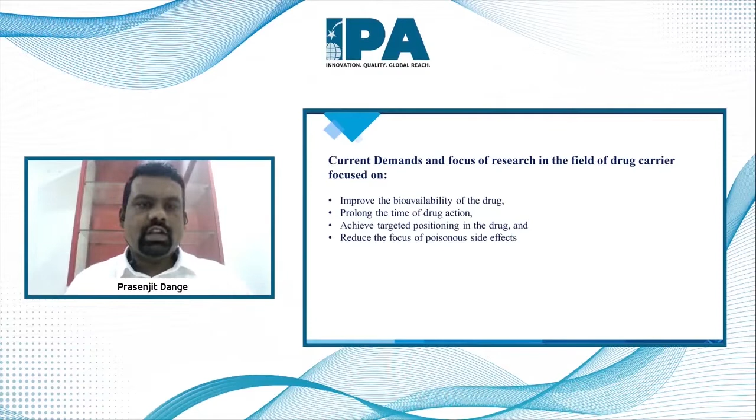So part one covers the current demands of the healthcare industry today, and the focus of the entire formulation research ongoing, in order to have improved bioavailability of drug substances and medicines all across the world, prolong the effect of drugs for individuals, achieve targeted positioning of drugs for a very targeted effect, and reduce the risk of any poisonous effect of the drug substances available.

Nowadays, recent developments in formulation are going towards microparticles, microspheres, and microcapsules, which are widely used as constituents of multi-particulate drug delivery systems, offering both therapeutic and technological advantages. Microparticles are generally in the range of 1 to 1000 microns in size, and serve as multi-unit drug delivery systems with well-defined physiological effects.

In order to improve effectiveness, tolerability, and patient compliance, microparticles, microspheres, and microcapsules are common constituents of multi-particulate drug delivery systems, offering numerous advantages based on structural and functional abilities. Their application is suitable for convenient and tolerable drug administration via several routes. Depending on the formulation, they can be incorporated into different pharmaceutical doses - solid forms like capsules, tablets or sachets, semi-solids like gels and creams, and liquids such as solutions, suspensions, and even parenterals.

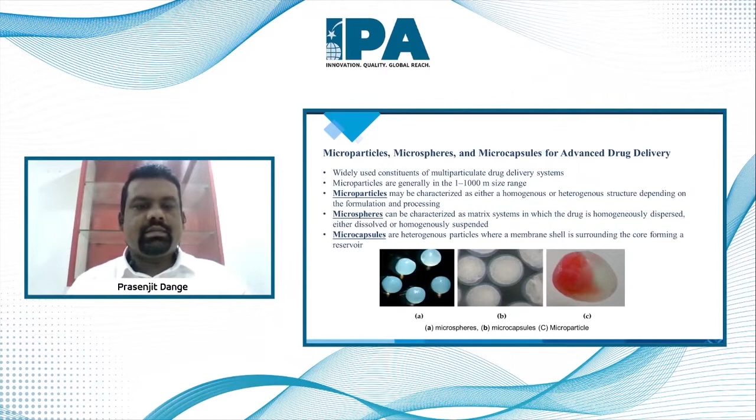The microparticle is a particle which is either homogeneous or heterogeneous in structure, depending on the pharmaceutical process. A microsphere is a kind of matrix that is completely homogeneous, dispersed, and either dissolved or homogeneously suspended. Microcapsules, on the other hand, are heterogeneous particles where a membrane shell covers the core, forming a reservoir. There are several methods for how these particle formations are done.

These particle formations possess a lot of methods - air suspension method, spray drying method, coacervation, and freeze drying is also one of the methods that can be utilized. In air suspension, also called fluid bed coating, there's a great advantage in that during the process the particles suspend in the air as an inert gas, with constant mixing relatively independent from each other, and then it forms dry particles.

Spray drying is widely used in industry for microencapsulation of volatiles, probiotics, and viable cells, having multiple advantages like uniform particle size, all steps carried out in one apparatus, use of organic solvents, and capabilities of encapsulating heat-labile materials as well.

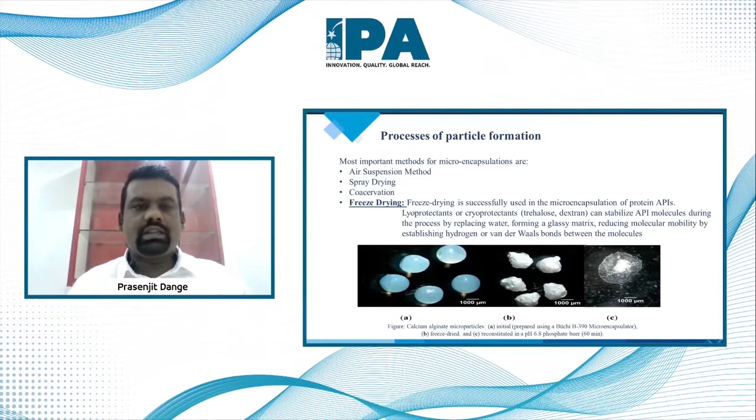There are multiple advantages and disadvantages of microspheres or microparticles in the industry. Focusing on advantages: microspheres have the ability to bind and release high concentrations of drugs, can be directly injected into the body, have controllable variability in drug release and degradation, and possess a constant and prolonged therapeutic effect, which reduces dosing frequency and improves patient compliance. Disadvantages include that they cannot be chewed or crushed, and there is a difference in dosages for drug release.

So this is a brief, overall description of microparticles, because it's a vast, big subject.

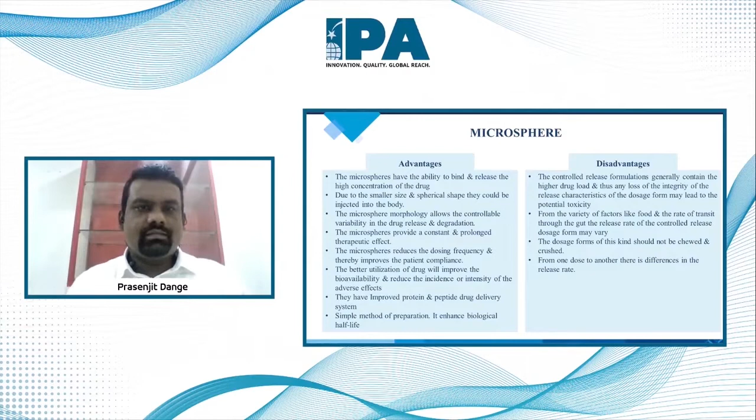That is part two: freeze drying process technology, research and development sharing. We will cover the important parameters of the freeze drying process, the process effects on the drug, protective agents, and the devices used to measure the important parameters of the freeze drying process of the drug.

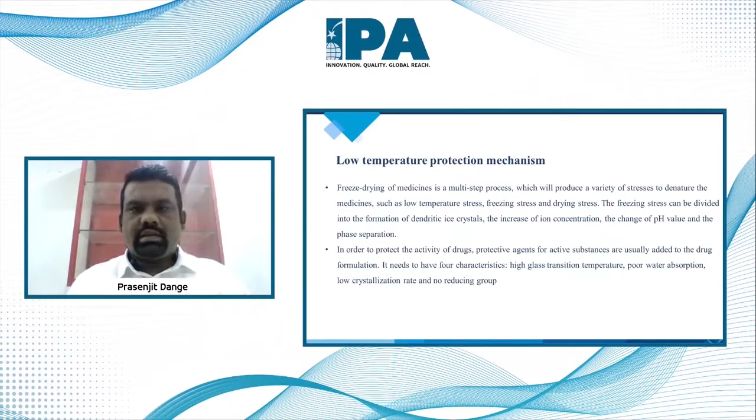As a process, freeze drying requires a protection mechanism because the process itself imposes a variety of stresses on the drugs. These stresses can be differentiated as low temperature stresses, freezing stresses, or drying stresses, and they can result in formation of dendritic ice crystals, increase in ion concentration, change of pH value, and phase separations.

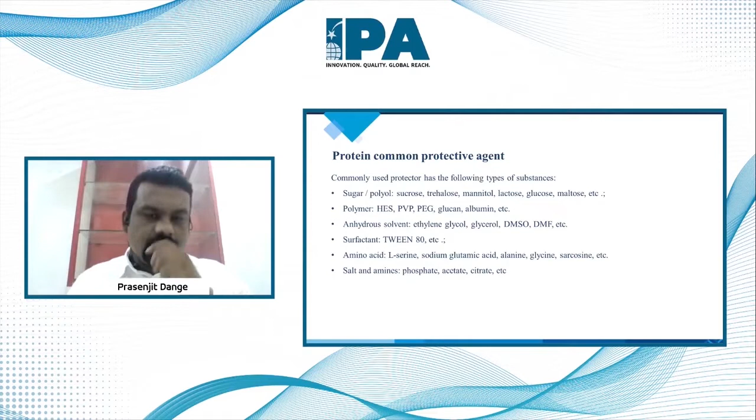To protect against these stresses during freeze drying, we can use a protective agent which plays a role in nullifying them. Protective agents for active substances are usually added to drug formulations. A protective agent must possess certain characteristics: high glass transition temperature, poor water absorption, low crystallization rate, and no reducing group.

There are some common protective agents available for this purpose, differentiated as sugars, polymers, anhydrous solvents, surfactants, amino acids, and salts and amines. These are the different kinds of protective agents used.

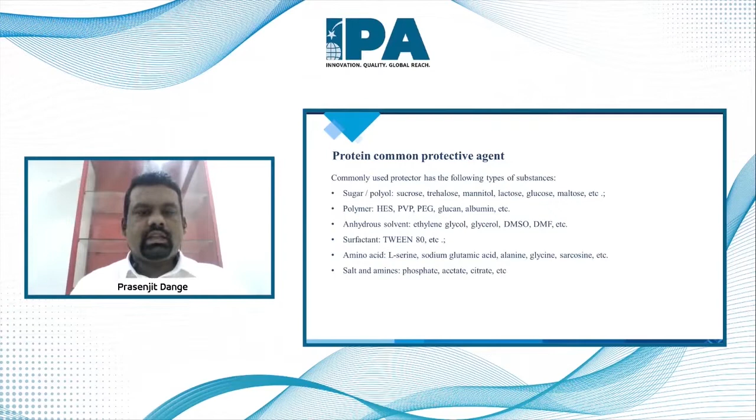Let's go to the next slide. As a freeze drying process, there are certain parameters which are very important for the complete cycle, and we need to understand certain characteristics of the drugs while doing freeze drying. A few of these parameters are detection of collapse temperature and glass state transition temperature.

Collapse temperature is one of the critical parameters for setting up the lyophilization process, because at this temperature the material either melts or softens so that it cannot support its own structure and begins to flow. This is why the substance should always be kept below the collapse temperature during primary drying in the lyophilizer. However, keeping the process too far below the collapse temperature will lead to an unacceptably slow complete cycle. Therefore, it is important to know the value of this critical temperature.

For crystalline systems, the maximally tolerable temperature corresponds to the eutectic melting temperature. Only below this point is the system completely solid, but most freeze-dried formulations contain amorphous phases. In this case, the collapse temperature is very close to the glass transition temperature. In many cases, the collapse temperature is slightly higher than the glass transition temperature, with the exact difference between the two being very small. So it is very important to determine both the collapse temperature and the glass transition temperature for any freeze drying formulation.

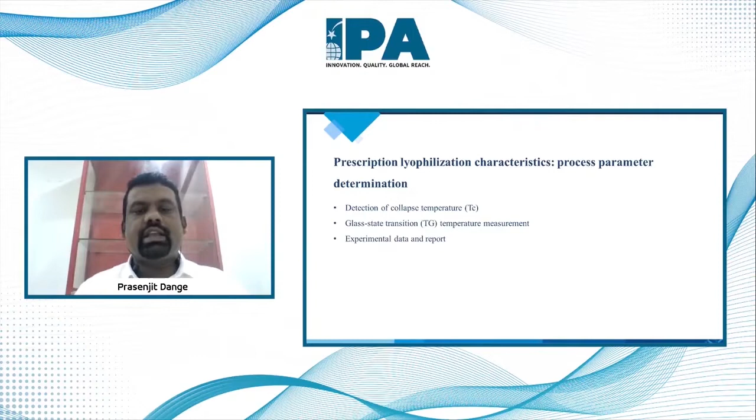There are many methods available to determine these particular characteristics of the drugs. One method is freeze drying microscopy, which is highly valuable for studying the behavior of formulations during freeze drying or determining critical product temperatures. This works somewhat like a miniature freeze dryer, where the sample is frozen inside a small microscopic chamber using liquid nitrogen.

By applying vacuum, the temperature is gradually increased, which we know as the drying process, and the samples start drying. During this temperature ramp, the sublimation front is observed and recorded through a microscope. Changes in the dried layer can be used to determine the state of the system, whether amorphous or crystalline, and the collapse temperature of the samples can be determined with this.

So this is one of the instruments which can be used for determining the collapse temperature.

Another instrument is the DSC, which we also call differential scanning calorimetry, which determines the glass transition temperatures. DSC is an instrument designed to detect changes in the specific heat of materials as it takes place while passing through the glass transition.

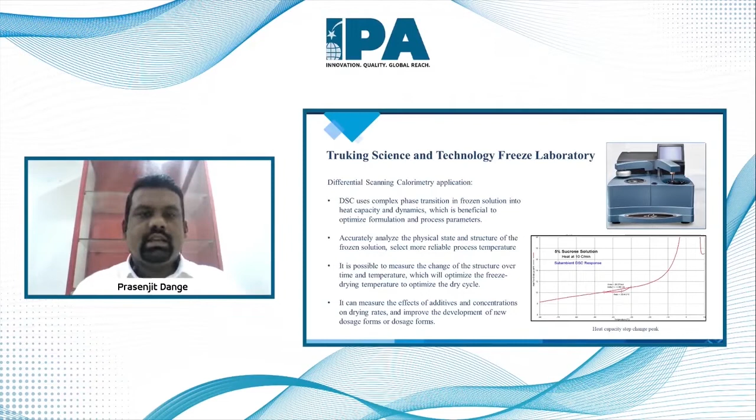Now we are taking these kinds of parameters used for any formulation in freeze drying, and using all these parameters and processes, implementing into the low temperature protection mechanism we were talking about earlier, we have an advanced study done with the client's expectations.

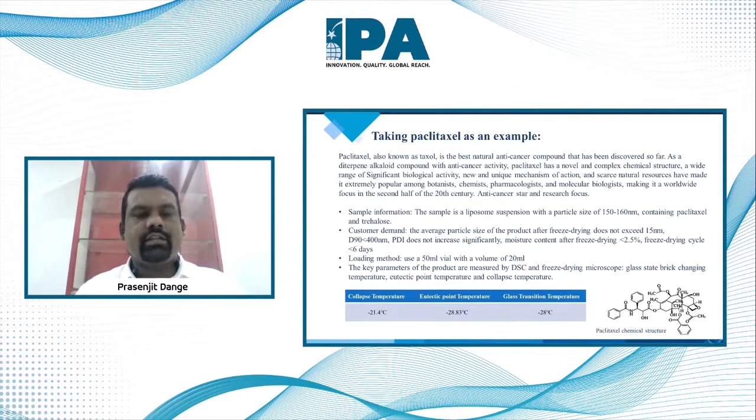In this particular case study, the sample offered by the customer was a liposome suspension with a particle size of 150 to 160 nanometers, containing paclitaxel and trehalose.

The expectation of the customer was that the average particle size of the product after freeze drying should not exceed 15 nanometer, D90 should be less than 400 nanometer, PDI should not increase significantly, and moisture content after freeze drying should be less than 2.5%.

The expectation for the complete freeze drying cycle was less than 6 days. We used a 50 ml vial with a 20 ml fill volume, and with available methods and temperature determinations, we found the collapse temperature at minus 21.4, the eutectic point at minus 28.83, and the glass transition temperature at minus 28.

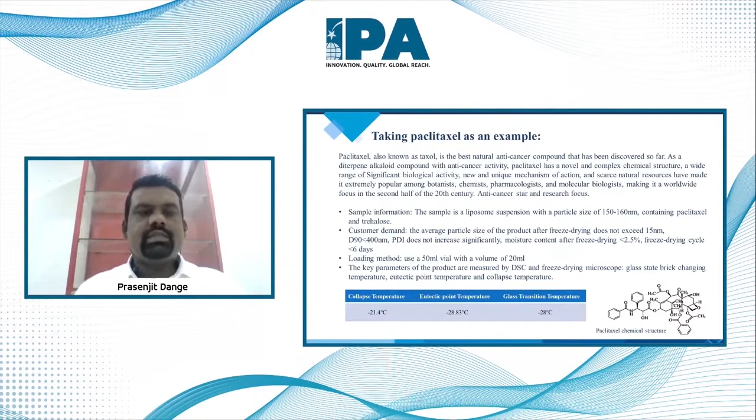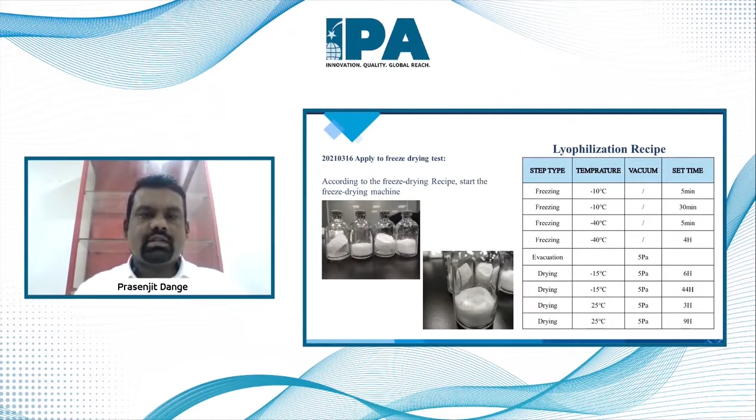The sample was completely lyophilized, and the moisture content was 0.93%. The lyophilization cycle was 69 hours in total. The product had a crystalline powder but not uniform in this case. The average particle size of the product was 17 nanometer after lyophilization, D90 was 380, and PDI was significantly amplified. So this was the result of the first recipe.

With this result cycle, the average particle size of the product after freeze drying was greater than the customer demand. So we adapted another cycle where we focused on super cooling and quick freezing mode.

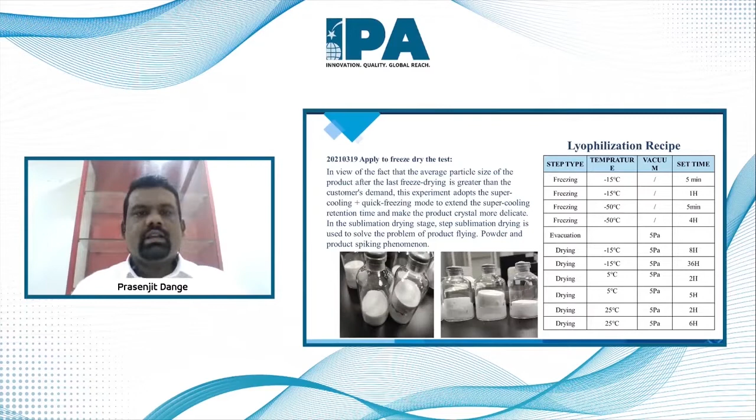The conclusion we can take from this: the sample was completely freeze-dried, with a moisture content of 1.63%, and the freeze drying period was 66 hours. The product is easy to take off the bottles, and the crystal is fine and uniform. After freeze drying, the average particle size of this product was 13 nanometers, which is less than what customers expected. D90 is 380, and PDI is not significantly enlarged.

So this is the particular case study we have done for the low temperature protection mechanism. These are the parameters which we could use and apply for the latest freeze drying technologies, and try to reduce the stresses on the product as well.

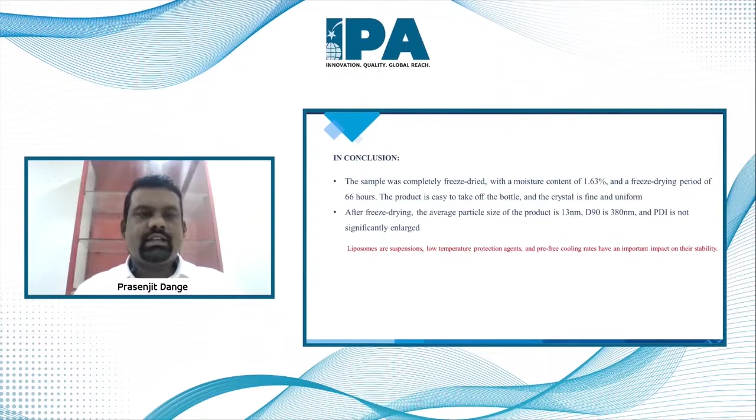With this, we go to the next part, which is the case study at the customer client, where we have used the particular mechanisms, and we have set up the machines also according to that.

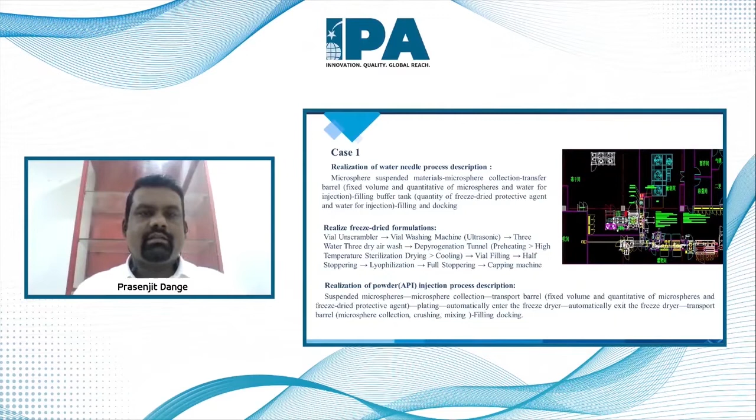There is one more layout where we have a complete line with 4 different lyophilizers in place, which can be used for a complete liquid freeze drying process. So this is about some case studies we have done, and now we go to the next part, which is the last part, about PAT tools and the latest.

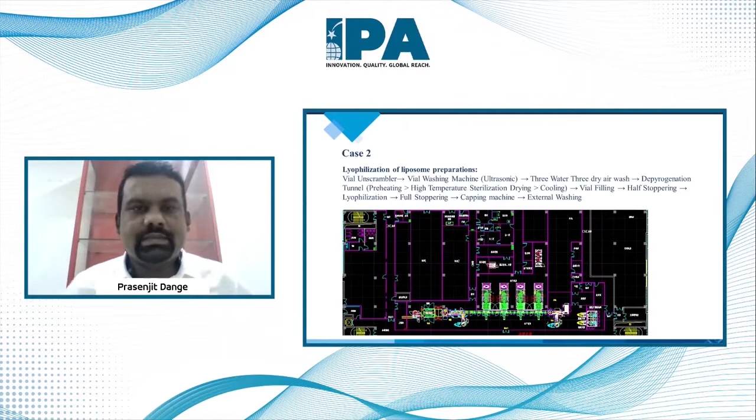So these are the latest PAT tools available in the market for the development of the lyophilizer. This is our setup available in the market, which is Truking Technologies and Romaco's joint manufacturing for the lyophilizers and filling machines under the isolator, as well as process technologies.

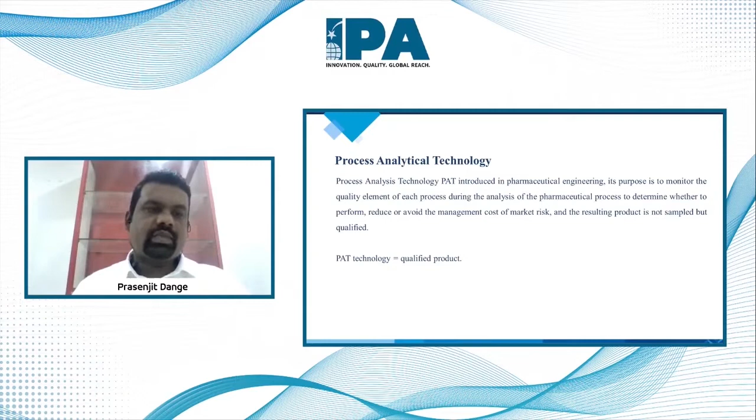Process analytical technologies are introduced in pharmaceutical engineering, and their purpose is to monitor the quality element of each process. There are certain different technologies available which are used to significantly optimize the product, optimize the cycle, and reduce the downtime, reduce the preparation time of the machines and the cycles.

One of the available technologies is called the MKS inline process monitoring system. This is basically an instrument used for giving the different composition of the gases inside the chamber of the lyophilizer. Once you install it, you can use the technical advantage of it to determine the different concentration of the gases available inside the chamber.

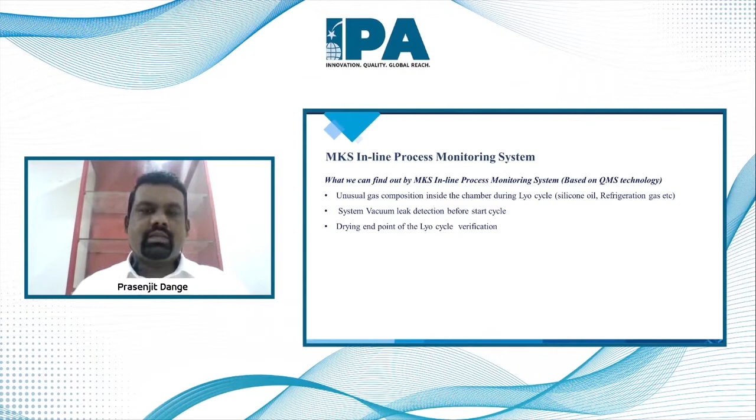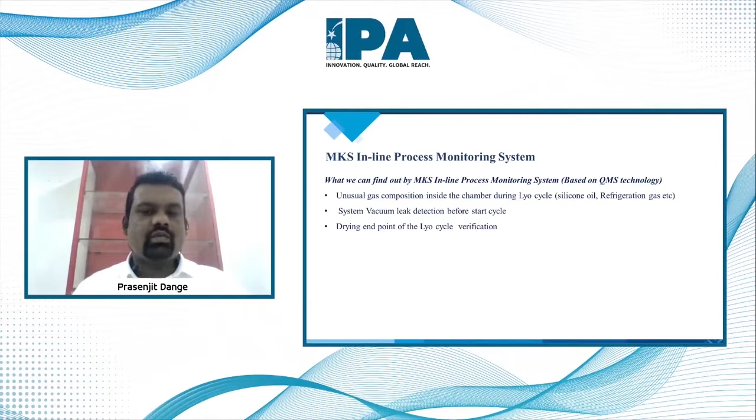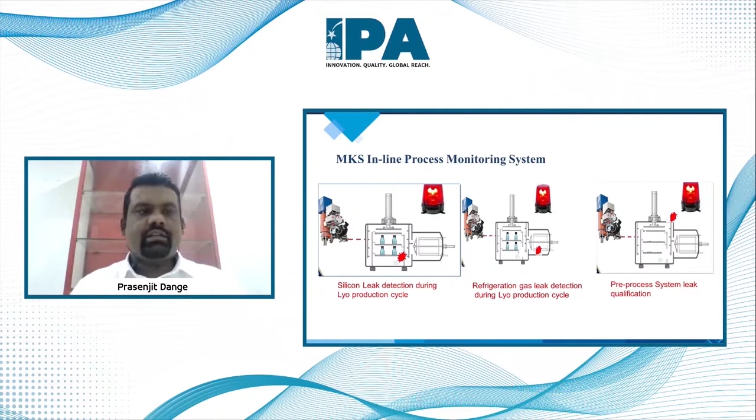It can also be used for vacuum leak detections before the start of the cycles, and also drying endpoint lyo cycle verifications. This kind of MKS instrument can be used for silicon leak detections during the lyophilized production cycle, and also for refrigeration gas leak detections and system leak detections. So this can be used not only for determining the gases, but also for determining any leakages inside the chamber before the start of the lyophilization cycle.

There is sensitive monitoring of water concentration, which is used for optimizing the process and verification of the endpoints. So MKS in turn can also give you the concentration of the gases, and at the same time, it can be indirectly used to determine the end of the drying process.

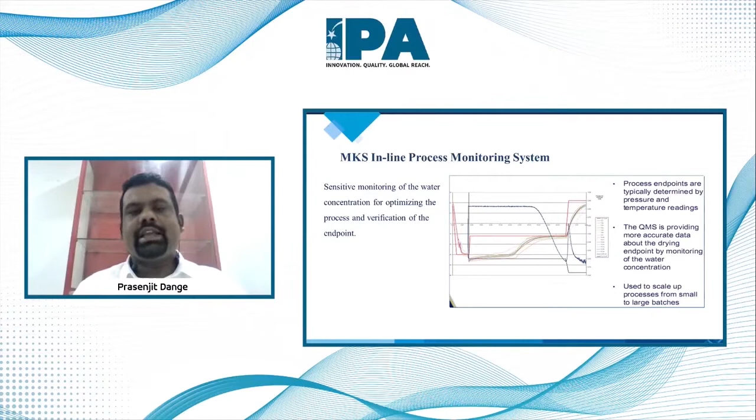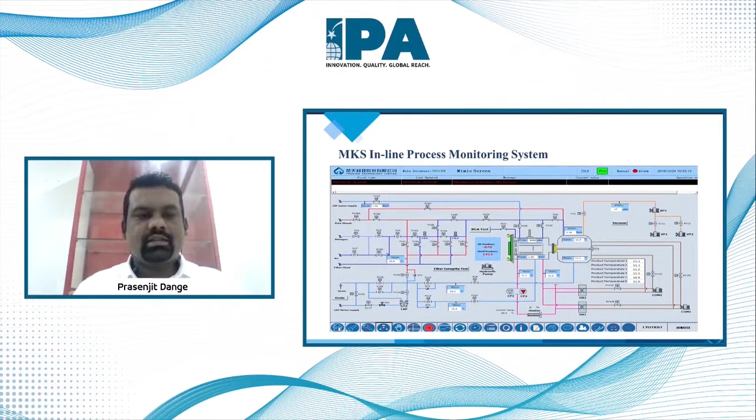Once you adapt this MKS inside the lyophilizer, this is like a SCADA of the lyophilizer, where you can have this RGA test shown in the middle. If you click this button, we can adapt this MKS instrument inside the machine, and you get the results of the different composition of gases automatically on the screen of the SCADA.

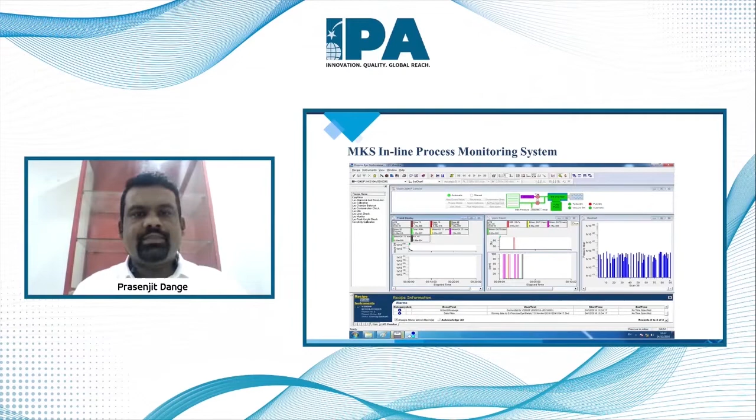Another instrument which is available in the market is the TDLAS, which is tunable diode laser absorption spectroscopy.

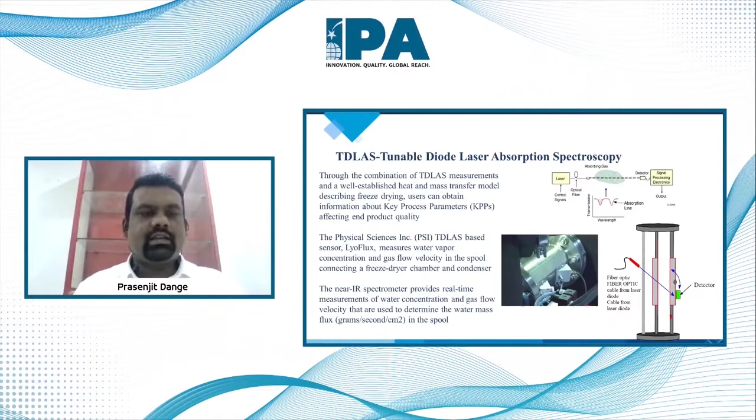This TDLAS works on the principle of flux measurement, combined with the knowledge of the spool cross-sectional area, which provides the determination of the water vapor flow in grams per second exiting the product from the drying chambers. These flow measurements are integrated during the product drying cycle to provide the determination of the total water removed, so we can understand the total mass of water vapor that has been taken out.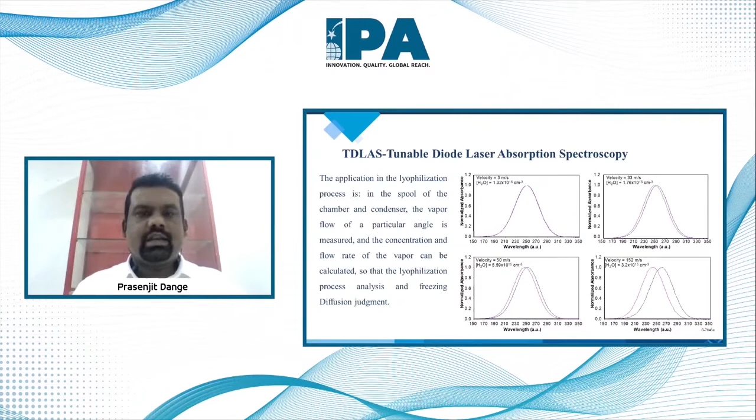Now, how to apply this TDLAS in the lyo cycle? When the chamber is already under vacuum, the sensor will show zero, as there is no speed of water vapor. Once you start, you have to stop the data recording and start the H2O mass flow flux points. Now the sensor will automatically calculate the H2O removed from the beginning of the drying. It can be easily integrated in the lyo SCADA, and it will give the results.

Comparing these kinds of technologies with existing thermocouple and RTD technologies or pressure speed measurement technologies, these above techniques are not directly measuring the mass flow and can only be used as a terminal detection method. However, TDLAS and MKS can be very useful for the entire process.

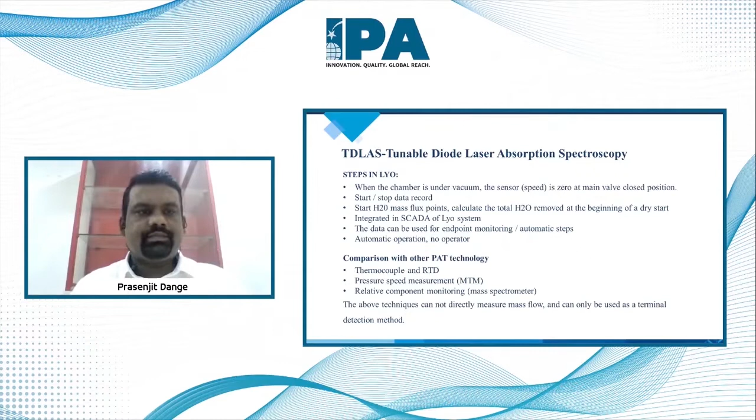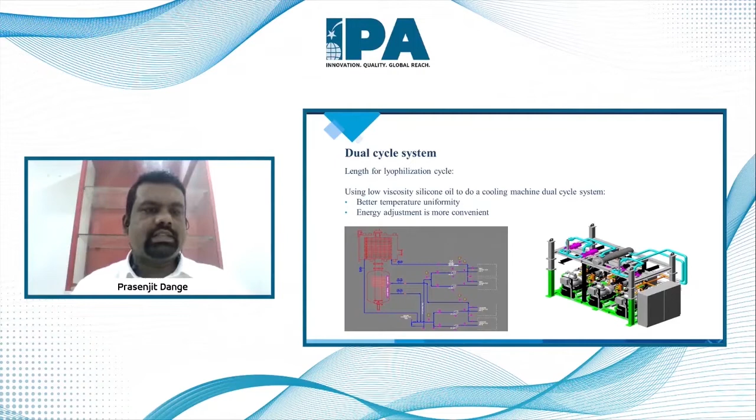There is another method we can adopt in the new lyophilization available technology, which is the dual cooling cycle system, using silicone oil for cooling down the shelves as well as the condensers. This has good results on uniformity, and energy adjustments can also be done. So these are the advantages available with the new technology of dual cycle cooling systems.

This is another development, for the automatic loading system. The current automatic loading system has a pusher in front, which has a bellow as well, and the cleaning of that bellow is quite challenging as per the regulations. So now we have adapted a different structure altogether, where there are two types of pushers available. One small pusher gives a small push of the vials to make the matrix, and once the entire matrix of vials is formed for the entire shelf, another pusher will give a complete push onto the shelves. With this development, we are avoiding the complete cleaning validation processes for the bellows used for the longer pusher. This is one more development in the sector available with the lyophilizer machine.

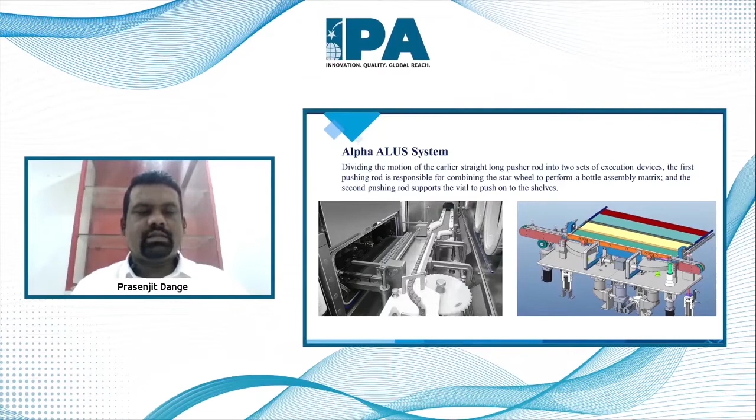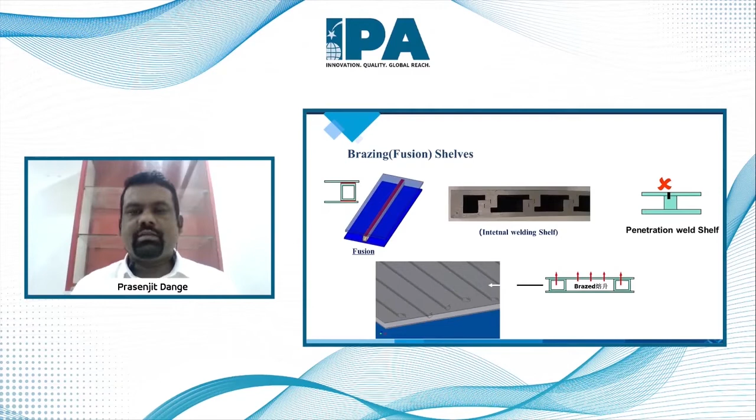One more new technology, not very new but already adopted by a couple of manufacturers across the industry, is called fusion shelves. These are the shelves, the blue colored one, called the fusion shelf, having a hollow baffle in between the shelves. Earlier they used to have internal welding kind of shelves, with a solid baffle in between, so in that region there was no flow of silicon oil. Also, because of the welding method, the thickness of the shelf was bigger. Now, with the fusion shelves having the hollow baffle, the flow of silicon oil can be everywhere, and the thickness of the shelves has reduced. So the brazing shelf is a very new and very useful technology available for the shelves of lyophilizers.

So if we talk about the advantages of the brazing shelf, there are many advantages associated with that. It gives increased flatness for the shelves. There is a hollow structure having metal to metal bonding area, which is much better than welded shelves, almost six times better than the welded shelf.

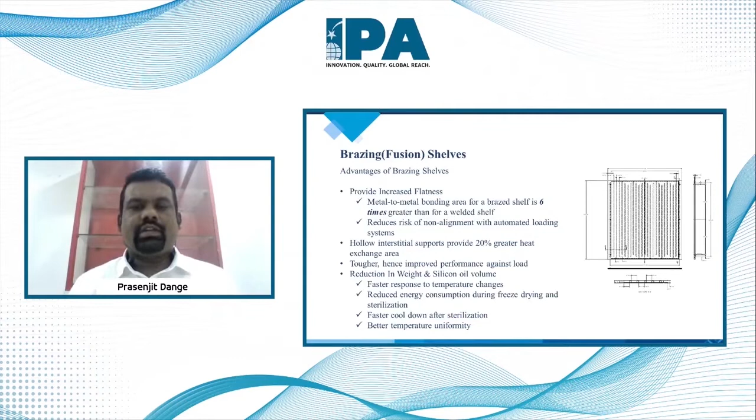Since it's a hollow structure, you can put more baffles in the shelves, which gives tougher, stronger shelves and reduces the risk of non-alignment. And since it's hollow, we get 20% greater heat exchange area, because in solid baffles there is no flow of the silicon oil through the solid areas.

As I said, it's tougher, so there is improved performance against load, for sure. And of course there is a reduction in the weight of the shelves, because these shelves can be slightly lower in width. Earlier, shelves were in the range of around 24, now it has already been changed to 18 in width.

Because of that, the silicon oil quantity is also reduced, and then the power requirement for cooling and heating of the silicon also reduces. It also has a faster response to any temperature requirement, faster cooling down after the silicon sterilization cycle, and the uniformity is better.

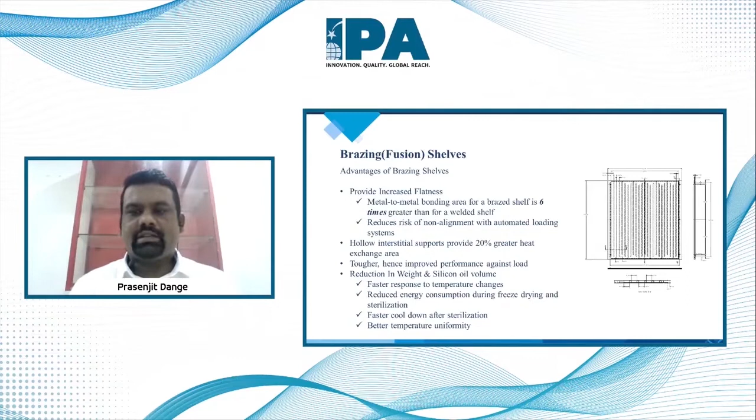This is how we are manufacturing the shelf, and there is also a method of welding the entire shelf's border. That particular step we are also taking very automatically now—there is no manual welding available. So if you go to the next slide, there would be a video played showing how we are doing the robotic welding of the shelf's border.